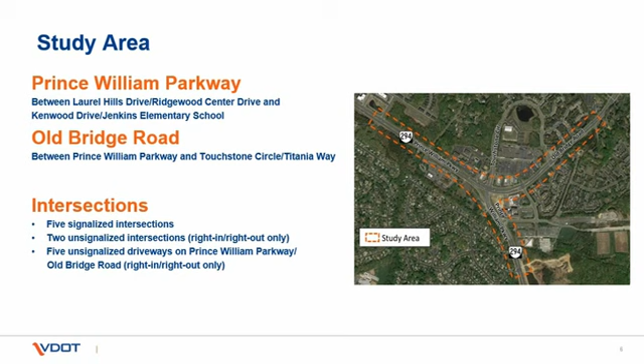The study area encompasses approximately 1 mile of roadway, and the different intersection approaches within the roadway carry between 35,000 and 50,000 vehicles per day. Prince William Parkway has a 45-mile-per-hour speed limit and 6 travel lanes with 3 in each direction. Old Bridge Road has a speed limit of 45 miles per hour and generally 4 travel lanes with 2 in each direction. Photos on these slides display critical views of approaches and study area locations.

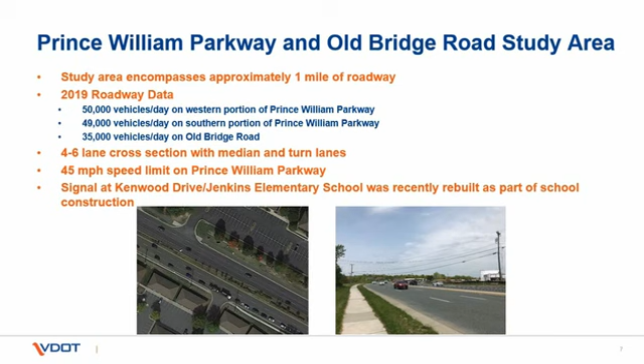The study area also contains several accommodations for pedestrians and bicycles. There are sidewalk and multi-use path facilities paralleling both major roadways, and all signalized intersections have crossings of at least 2 approaches to allow pedestrians to get from one side to the other of the major routes. There are also several locations where OmniRide bus stops are present for transit connectivity.

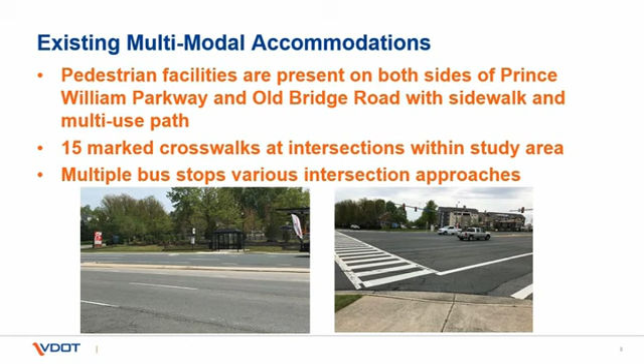To assess safety conditions along the corridor, the study team reviewed crash data for the 5-year period from 2015 to 2019. A total of 321 crashes occurred within the study area, including 106 crashes that resulted in injuries. Of the total crashes, 62 occurred at or in the vicinity of the intersection of Prince William Parkway and Old Bridge Road. The charts included show that the majority of crashes in the study area are rear-end or angle-type collisions, and the majority occurred during daylight or lit conditions.

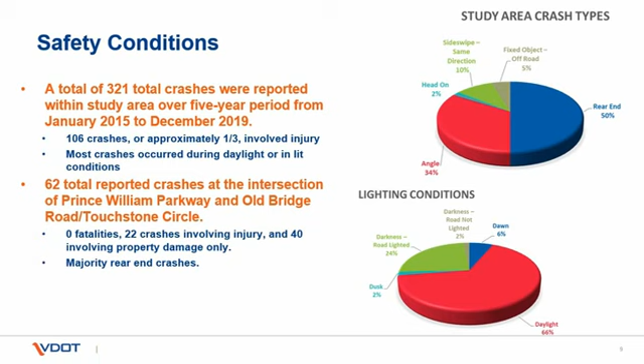This figure shows the number of crashes which occurred over the course of the 5-year period at each intersection along the corridor. Prince William Parkway and Old Bridge Road has the highest concentration of crash activity. There are also high crash numbers at Black Forest Lane and Reids Prospect Drive, as well as Laurel Hills Drive and Ridgewood Center Drive, that are primarily due to eastbound congestion during the morning peak hours.

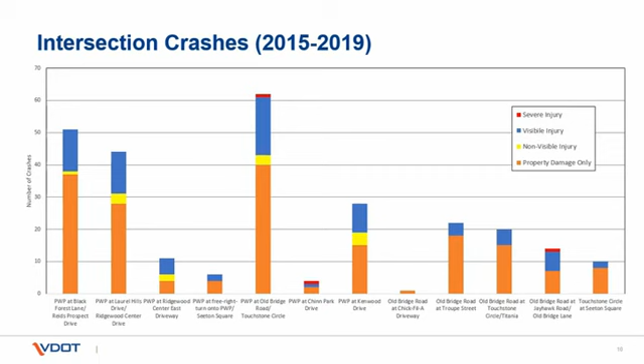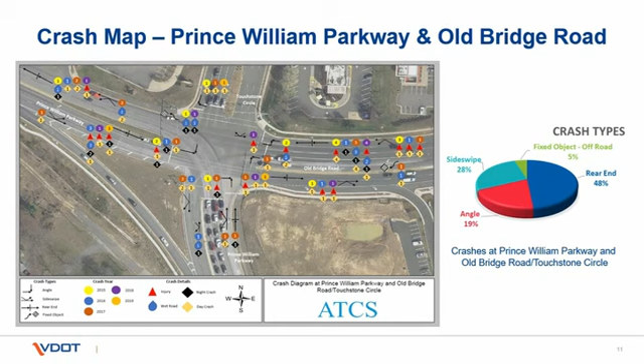This figure shows greater detail and mapping of the crashes at Prince William Parkway and Old Bridge Road. Diagrams such as these are what the study team utilizes to determine where key locations for safety improvements are needed. The chart gives information on crash type, date, lighting, and pavement conditions.

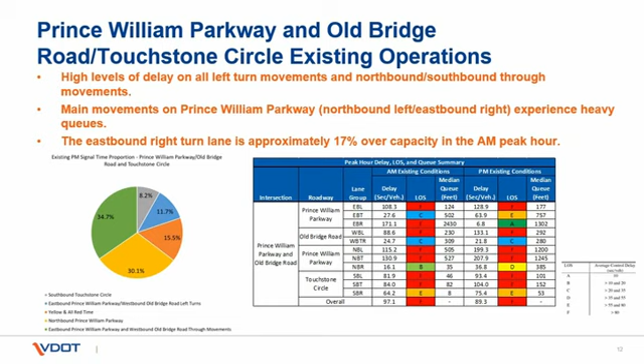This slide gives information about the current operational conditions as measured by delay of individual approaches and level of service. These results are representative of Prince William Parkway and Old Bridge Road, utilizing current signal timing and phasing allocations and optimized future timings. From the graphics and information, we can see that there are very high delays and extensive queuing during the peak periods on most approaches. This has resulted in a very low level of service of F for many movements. With the current phasing and demand, no approach receives more than 35% of available time.

As of this presentation, the study has made steady progress through the collaboration of the full team. Existing conditions have been fully analyzed under current signal timing and phasing, and future growth and traffic forecasting has been performed. The study team has screened several alternatives to determine those that are most viable to bring to the public for consideration, and those options have had preliminary cost estimates and sketches developed.

Currently, these improvements focus on the intersection of Prince William Parkway and Old Bridge Road. Additional minor improvements may be recommended at other high crash locations after further consideration by the study team.

There are several corridor-wide improvements that have been identified that include upgrades to signal displays, signal phasing, signal operational improvements, and low-cost safety improvements such as high visibility backplates and pedestrian equipment upgrades. These improvements may move forward during maintenance activities or when other funding sources are available and are being considered at all intersections within the study area.

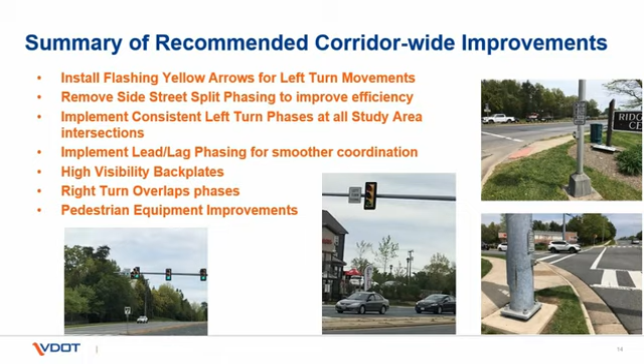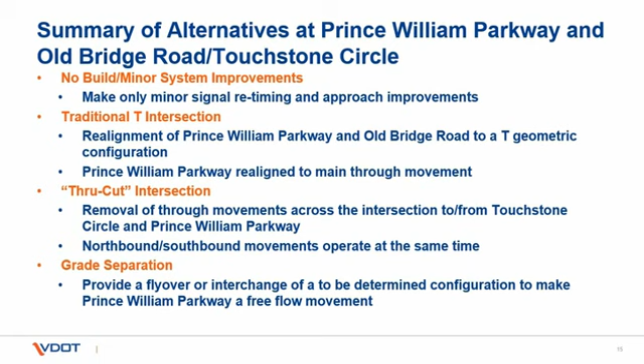A summary of the alternatives for the main intersection of Prince William Parkway and Old Bridge Road that the team is asking for the public to provide input on is shown on this slide. A no-build alternative would mean no significant changes to the intersection would be made, and all approaches and travel paths would remain as they are today. Only minor improvements, such as those described in the previous slide, would be made. The additional improvements will be discussed in greater detail in the slides that follow.

This slide shows the current concept and rendering of a standard or conventional T intersection. The intersection would be reconstructed and relocated from its current configuration such that Prince William Parkway would become the through movement in a northwest-southeast direction, and Old Bridge would be connected as close to perpendicular as possible, or T'd in. The approach to Touchstone Circle would become a right-in, right-out access point on Old Bridge Road.

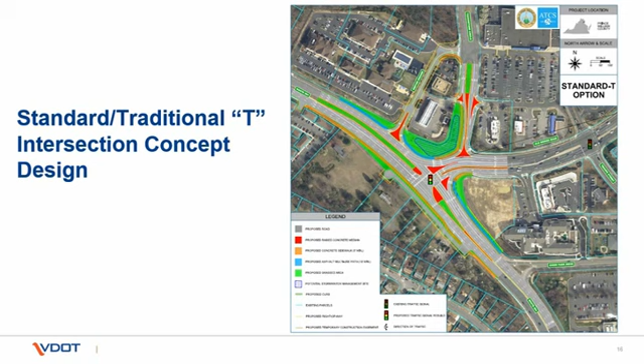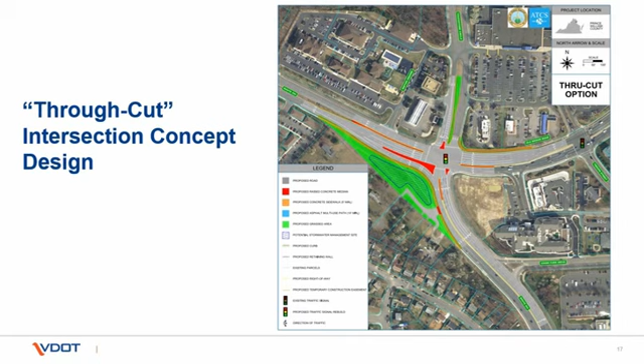This slide shows the current concept and configuration of the through-cut alternative. Named a through-cut, as the through movements across the intersection to and from Prince William Parkway and Touchstone Circle would be restricted to allow for both left turns to move simultaneously. This would remove a full signal phase and allow more green time to be reallocated to all approaches. As part of this concept, the eastbound approach of Prince William Parkway would also be expanded to allow for dual right turn lane capacity. All other movements would remain as they are today.

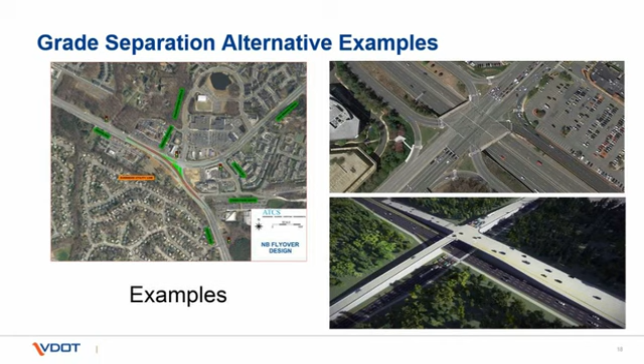This slide addresses examples of possible grade-separated alternatives. Current options include flyovers, underpasses, or other separations such as an echelon-type interchange. While the exact configuration is not yet determined, the goal would be to allow Prince William Parkway to be a free-flow movement.

The next steps on the study start with you. The MetroQuest survey to allow for public input on issues and priorities within the study area, as well as on the current alternatives, will be open from June 29th to July 17th and is available via hyperlink on the study website at www.virginiadot.org/Prince William Parkway at Old Bridge Road Study. We encourage you to give as much input and feedback as possible.

Your comments and suggestions help guide the decisions of the study team on what alternatives should be selected for future funding pursuits, such as Smart Scale or NVTA, and features of those alternatives that should be revised or reconsidered. It is expected an application for statewide Smart Scale funding will be submitted by Prince William County in August of 2020, and that the finalized study documents and report will be publicly available on the study website by September of 2020.